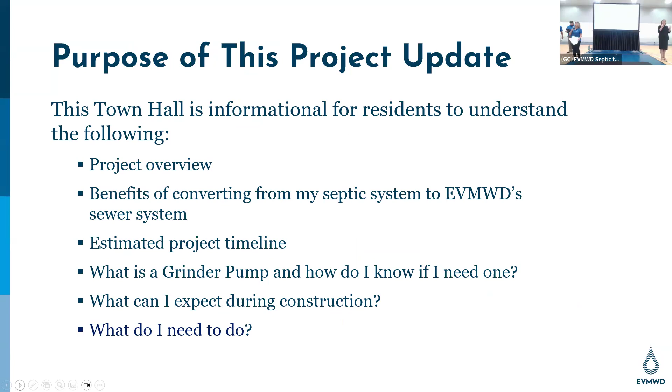First, I want to introduce the project team. I'd like to start with Director Harvey Ryan, who's in the back. He is on the Elsinore Valley Municipal Water District Board of Directors. In addition, in the back, I have General Manager Greg Thomas, Director of Water Resources Parag Kalaria, Engineering Manager Nelson Nuesca, and then up here with me today is Brian...

Korkog, sorry, I'm new to Brian. He's our senior engineer, and Joe McGee is our principal engineer. They will be very hands-on with the project, so from a technical aspect, these are your go-tos. They are part of the technical team with our consultant. And then from an outreach perspective, everyone here today in the blue shirts is part of the outreach team. They partner with us to help get the information out to you.

So, what is the Septic to Sewer Conversion Project? We were lucky enough to secure funding from the Clean Water State Revolving Fund, which provides low-cost financing for sewer treatment, stormwater management, and sewer system projects. It allows eligible participants to complete crucial infrastructure projects and address water quality needs. In this case, we will be able to cover the costs associated with converting your privately-owned septic to the Elsinore Valley Municipal Water District sewer system.

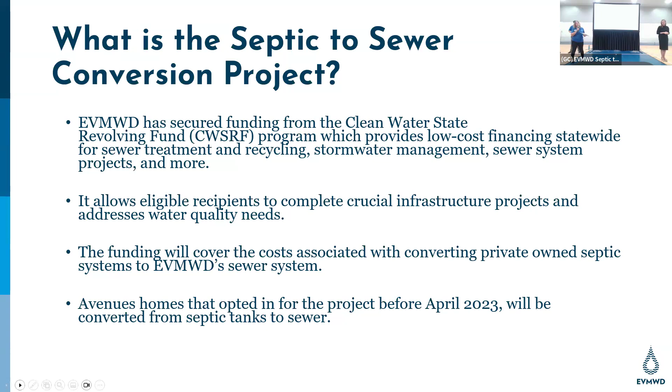So with that, I'm going to pass it off to the subject matter expert, Joey. Thank you, Christina. Good evening, everyone. Really good turnout, appreciate you guys showing up. As Christina mentioned, Brian and I are in the engineering group.

We're tasked with finishing the design and seeing this through construction, working hand in hand with our consultants and ultimately contractors. We'll start here with why this project is important. Many of you are aware of some of the downfalls of a septic system. Those include leaching nutrients and fecal coliform into the soil, which could contaminate the surrounding environment, especially groundwater or nearby creeks, swales, or other surface waters. It really doesn't matter which type of septic system you have - this occurs anytime you percolate fluid from the septic system into the surrounding soil.

A septic sewer system, as it percolates into the ground, could ultimately contaminate local groundwater or surface water. This is especially a problem when it occurs across a large area. That's why, as Christina mentioned, it's very advantageous for this program to go out and attack the entire neighborhood. So we appreciate all of the opt-ins that we have, and that's why we're proceeding with this project.

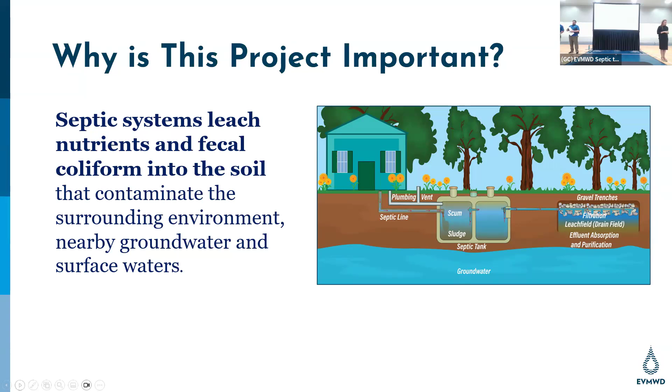So what are some of the benefits of converting to the district system? Generally improving health by reducing potential exposure. It obviously improves groundwater quality, like we just talked about. More recycled water - our plant treats all fluid discharged to it to recycled water standards. We reduce water pollution in general, and obviously reduce septic odors, especially across the entire neighborhood.

You have the potential for increased property value. Obviously, connection to a sewer system is advantageous. You get to eliminate any septic system maintenance costs. And then, of course, if any of you were planning on it sooner in the future, this does open up the possibility for ADUs on your property, whether by yourselves or children in the future, because that is a county permit requirement.

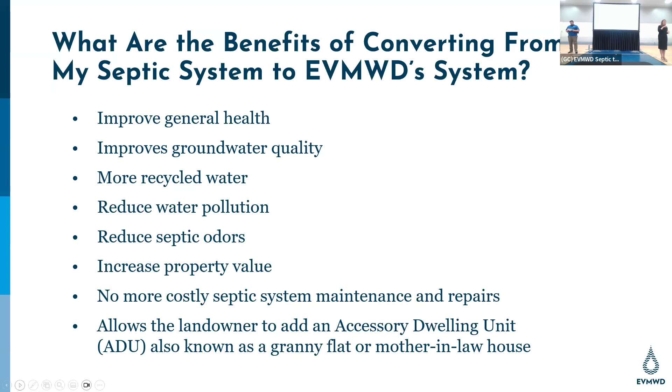A quick estimated project timeline here. As Christina mentioned, I think most of you are well aware you've opted in - that's why we're here. We will be talking in more detail about the ROE and answering questions as we split apart. Was there anything further you wanted to add on ROE? Just that we'll come back to it, we'll talk about that in a minute. Sounds good, we have a couple slides dedicated to that.

Okay, well, good evening everybody. I'm Brian Corcock. With that said, thank you, Joe. Joe and I will be discussing in more detail the construction features and aspects that will take place with the general project timeline. But I want to provide a general timeline of what's going to take place during construction, and we'll get into further detail in the following slides.

So with that said, when are we going to expect construction to start, or the project to start? We're anticipating sometime at the beginning of next calendar year for when this project will start construction. So with that, what is to be expected?

So first off, during construction, one thing that will take place with the contractor is the main sewer line being installed. From there, the sewer line installation from the public right of way to the main trunk line will occur, and then the grinder pump install will take place at a later date, followed by the lateral mainline connections to complete the project in its entirety. So this is just a generalized outline of what's going to take place.

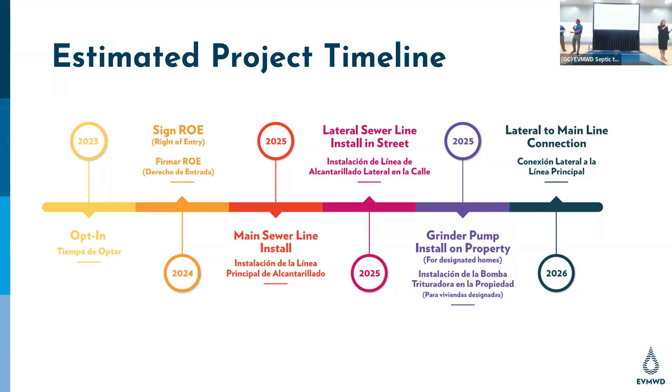I want to expand on that a little bit, just to let you know this won't be the last time we talk to you. We'll be sending out notices when we start construction, when we need to get onto the property to verify tank locations, and again when we're ready to start building the new laterals. So this project will not start immediately with the lateral work on properties. You're going to see typical street work, heavy construction crews installing pipelines and manholes. The lateral conversions occur at the end.

Go to slide 11. There we go. So with that, we'll talk a little more about what's actually happening on the lot with the lateral work.

Like I said early on, we're going to identify the location of the tank as part of reporting requirements we have to the county. Then we will proceed with the destruction of the tank. The method of destruction will vary depending on a few factors - it changes lot to lot, depending on the type of tank, material, and age. So that's on a case-by-case basis. From there, we'll work on the lateral itself, intercepting your connection at the same place the tank is, to minimize redoing piping and minimize additional piping that isn't required.

If you got notice in the mail regarding the grinder pump system, we would also install the grinder pump at that time, which requires a connection to the electrical panel to drive the pump. We have a real live example in the back you can take a look at. We'll inspect that electrical panel early on in the project when we're locating your tank.

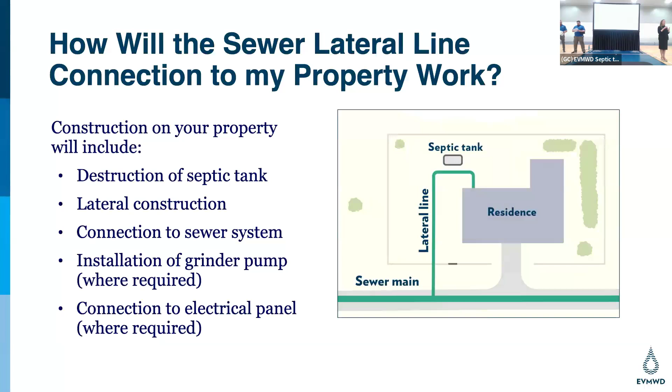So the grinder pump itself - how do you know if you need one? In general, a grinder pump is a wastewater pumping unit used in areas where gravity sewer service is not available or practical. It's typically installed for homes located below the main sewer line. So it's a physical problem - the easiest thing for stormwater, and in our case sewage flow, is to flow by gravity.

If your lot is sufficiently below the street in front of you and your driveway goes down a grade, there are problems with gravity flow. We've evaluated each lot in detail with our engineers and noted the ones we just couldn't avoid - where the pipeline couldn't go any deeper to ensure your lot could flow by gravity. So instead, we're going to pump it. It turns the flow discharged from your homes into a holding tank, pressurizes it, and sends it up to our sewer system. They're pretty common.

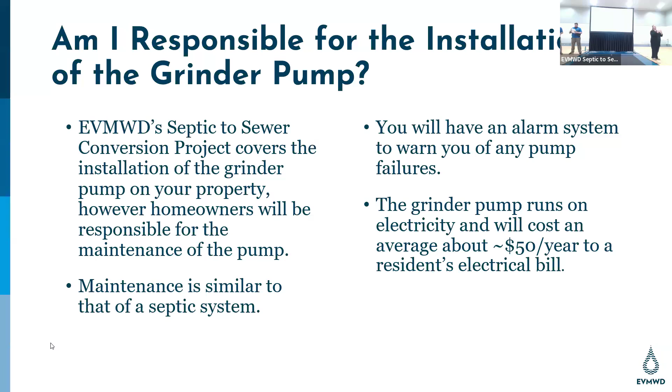Some things you can expect during construction: our community outreach team is going to continue to be in communication with you guys. As I said, we're going to start prior to construction, and there are certain things we want to make sure are well communicated with you on a per lot basis, since there's specific information our contractor and the county need for permitting.

Once groundbreaking does occur, that's going to start in the street with heavy construction, excavators and dump trucks putting in the pipe and manholes. That's going to impact the streets, just like any other type of utility construction. It's going to result in traffic control and delays on certain streets, probably impacting one street at a time.

There will be noise typical of any type of construction, but the working hours are typical. We should be wrapping up by 4 o'clock every day.

And then of course there's dust and probably parking impacts, because some of these streets are pretty tight. They'll need some space to maneuver, so we may do some temporary no parking zones for a couple of days in a specific area. But that's something we'll notice you guys well in advance to make sure everyone can plan accordingly.

A key component of this is the property access itself. We've done a lot of investigation, including specific site visits. We've laid out the location of these laterals, and we plan to proceed as planned with our contractor when they are on board, hopefully early next year.

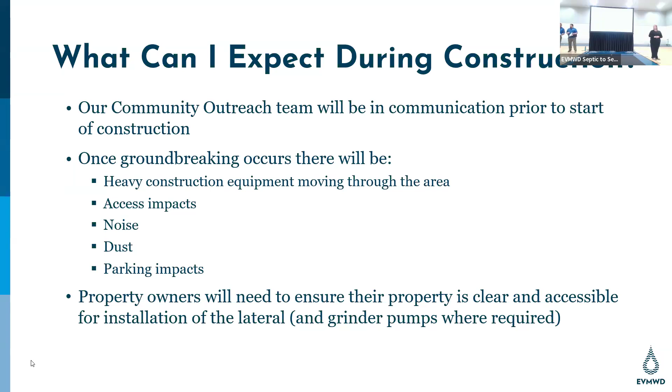So what do we need you, as a property owner, to do? The right of entry form — all of you should receive this in your packet.

You have time, we'll go through the timeline right now. The right of entry is the contract between the property owner and us as a government entity that allows us to go on your property and do the work we need to do. It includes all the details of the type of work the district is going to complete and any noticing required before we do the work. An important thing to note is we cannot start construction until we receive all signed right of entries, and every single property owner on the deed must sign in order for us to accept it.